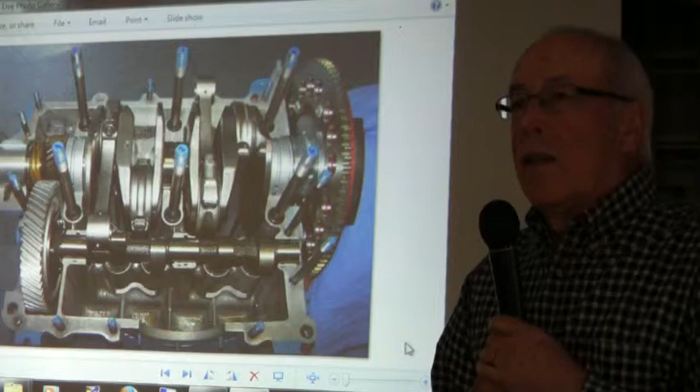At the time I made my decision, I was already taking lessons on the Allegro, which is Rotax-driven. I had a lot of confidence in the engine. When I was hearing the engine in flight, it made me comfortable, it's such a smooth engine, not that noisy. So I thought the Rotax is a solution for me.

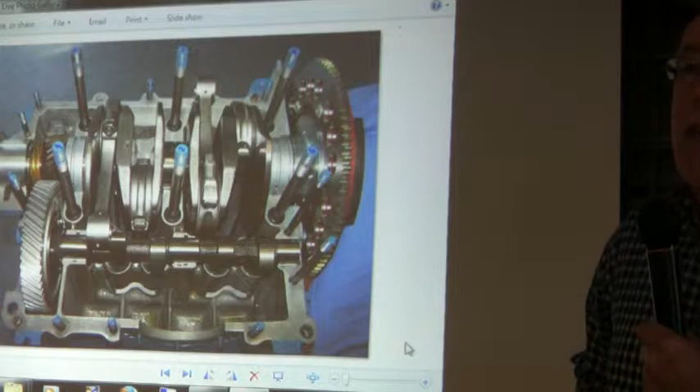Of course, given my age, light sport was a solution too. You never know when you're in your 60s how long you are going to be in good health. Although I had no particular health problems, I thought it's the conservative way to start flying.

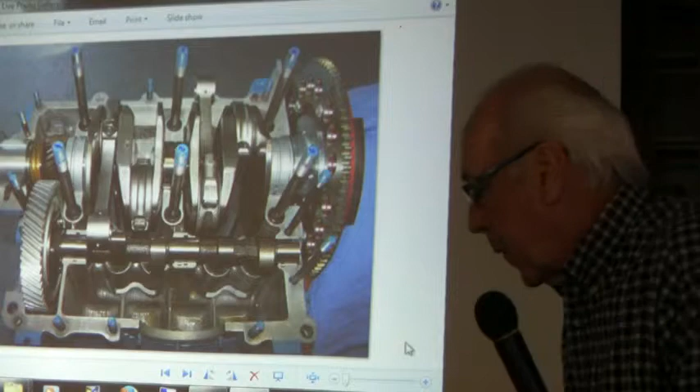So here I am in business in 2010. Well, this is not very good. I'm sorry about that.

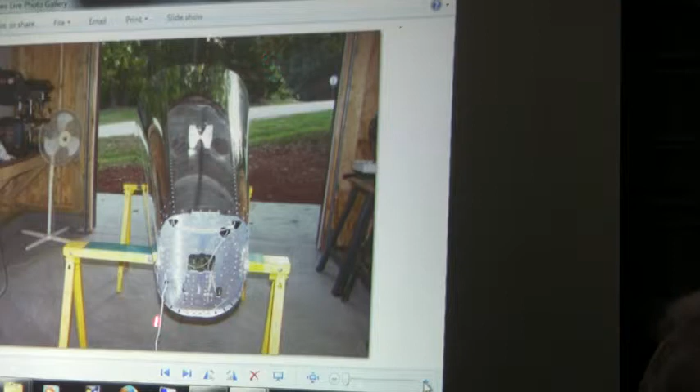This is the tail cone, also part of the biggest part of the first kit, and it's a pretty bulky part. Actually, I had a problem. Well, I had a problem all the time. You know, it's a one-car garage. You see how it's not that wide, and as you build, these things take room.

So, vertical stabilizer, stabilator, and rudder went straight away in the guest bedroom, and they stayed there for a couple of years. My wife was not too happy about that. This was more questionable to bring in the guest bedroom. So what I did, I tucked it under the roof, and it stayed there also for quite a while, of course.

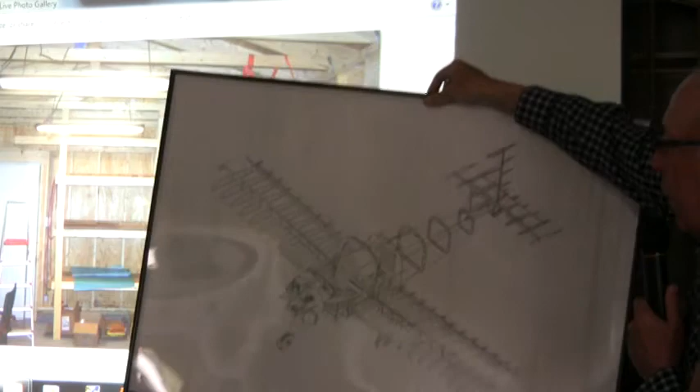Oh, this reminds me that I brought here this drawing you see over there on the wall, which shows in detail all the details of the plane. Unfortunately, we are not in a setup where I can show it to you, but you see much better here what the parts of the first kit are. Basically, from this bulkhead to the end. This is the first kit.

So I start building the wings in the middle of winter, and before closing these wings, I used a nice feature of EAA, which is use of a technical counselor. So I asked for a technical counselor to come for an inspection of what I had done. And a guy, I don't remember his name, came to my place and made a nice inspection, was very encouraging in his report. He's making a report, I still have the report. Actually, he collected all the reports he made.

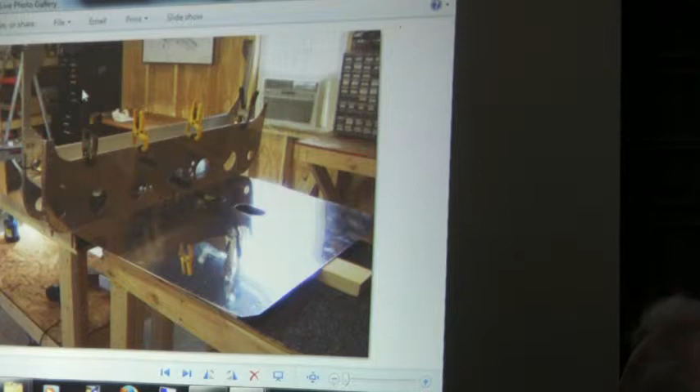So we are sitting in front of it here. And actually the wing spars, the two wing spars, are also coming and sliding in front of it. Yes, for those who don't know the RV-12, it's the only, I think, light sport that has removable wings. A very convenient feature, and you are going soon to see why it's so convenient.

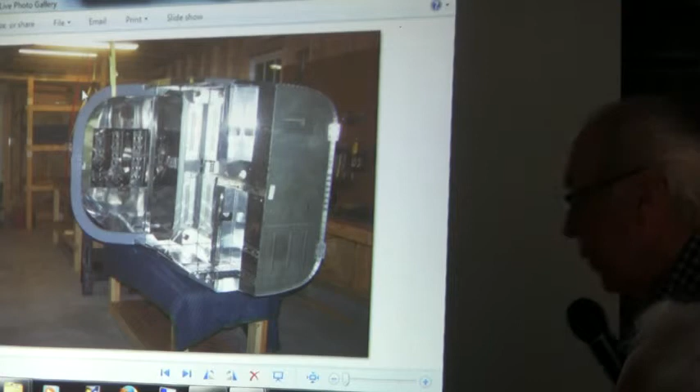When I continued to build, you see that at some point, to have better access inside the cockpit, I built it with the fuselage on the side, so that I could much more easily work inside rather than going into it. So the fact that the wings are removable means that you can, for a long time, work without the obstruction of the wings on the airplane. Actually, still now, when I do my first annual review, I will remove the wings to have better access to everything.

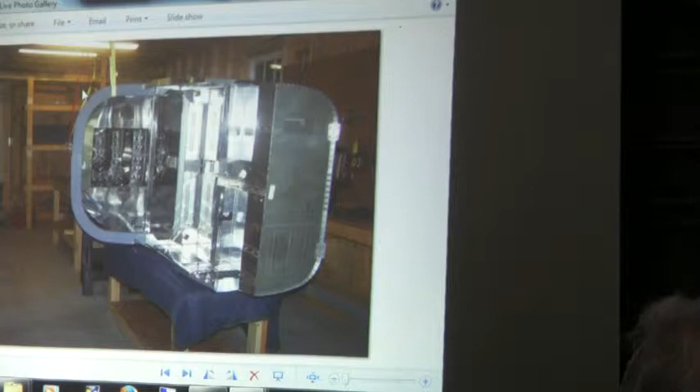So the fuselage is probably one of the biggest works to do. At some point you see I attach the tail cone. The tail cone is no more hanging here, but has been attached. But it's still workable, I still can turn it on its side. My daughter came and we installed the seat, so we could really make real airplane noise, starting from this point. That's it.

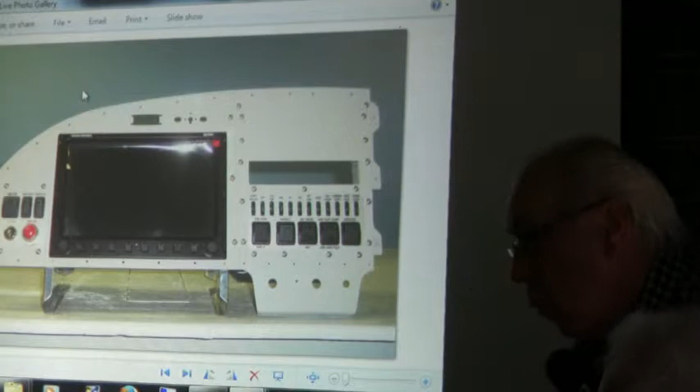Ah, yes, an interesting one here. While I was building the wings, probably in the middle or the end of 2011, Van's announced that they had discontinued their initial avionics. The first avionics was a Dynon D100 with, located here, a Garmin GPS. What happened is that Garmin stopped making this GPS. So Van's was stuck, and rather than taking the new version of the GPS, they knew the SkyView had just come out. So they decided to switch to the SkyView because the SkyView has a GPS integrated.

So they came with this, and this is not mine, it's what they displayed at the time when I was building the wings. The new panel. Of course, my panel was for the old avionics, which means that this part and this part had to be changed because the SkyView screen is larger than the D100. So first big change, and they took this opportunity to also change the position of the buttons and so forth. So it was the first thing that I experienced that would happen again and again.

The RV-12 being a pretty recent design, I think it was complete from the kit standpoint at the end of 2009. But not that many planes had been built at this point. By the way, my kit number is 395, which is pretty respectable for a kit just 2 years old. But at this time there were less than 100 planes flying, I think.

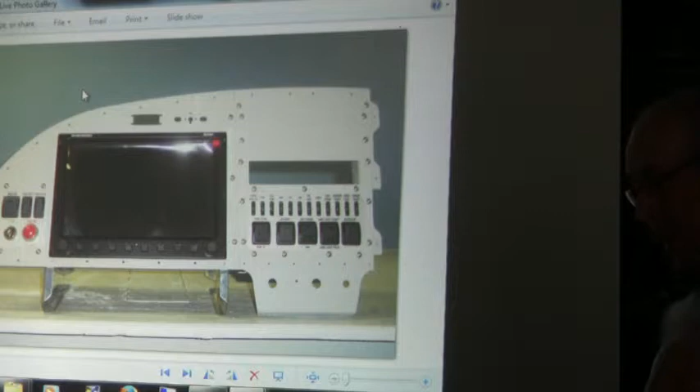Okay, so let's go now. We are in June 2011. The finishing kit is coming. The finishing kit is lots of stuff actually: wiring, gas tank, landing gear, canopy, cowling, autopilot. Lots of little stuff, and the big box is also explained by the fact that inside there is a canopy bubble.

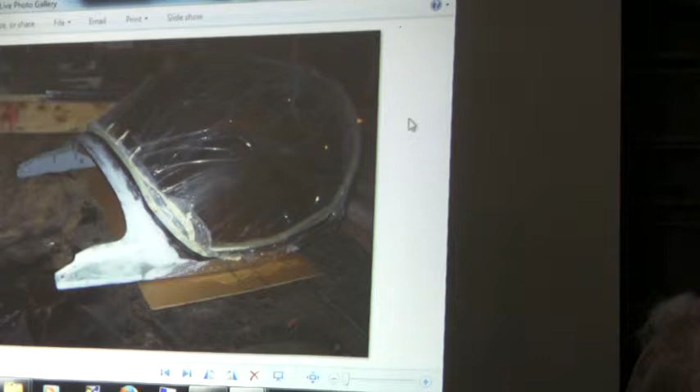The canopy here was a critical part, very difficult, and I didn't want to do it. It's the canopy fairing in fiberglass, and I asked Roger Fowler, who is part of this group too, who is very skilled in fiberglass work, to do it. So he took care of this part. I'm happy that he did it because it's very nice, and it's so visible that if you don't do it well, everybody will see it.

You know, you get very famous when you are building an airplane in your neighborhood. I used to work with my door open, and for a long time this thing looks like a boat. And it took quite a while for neighbors driving by to find out that I was building a plane. And then I became famous, you know. My wife was once at a meeting at the local church, and there was a nice lady beside her, and they found out they were in the same neighborhood. And the lady told her, do you know that there is a man building a plane in our neighborhood?

Well, what did your wife say? Did she deny it? Never heard of it. Never know. Such a crazy guy. Maybe she did. She didn't tell me the end of the story. Who knows?

So now we are in... I received kit number 4, the finishing kit, in July 2011. We are in June 2012, 1 year later, with kit number 5, which is the avionics. Of course, 1 year later, because Van's had lots of problems releasing the new avionics kit with the SkyView. They had lots of problems because they were nice enough, of course, to take into account people like me who had built it before, which means that my wiring in the finishing kit was based on the old avionics.

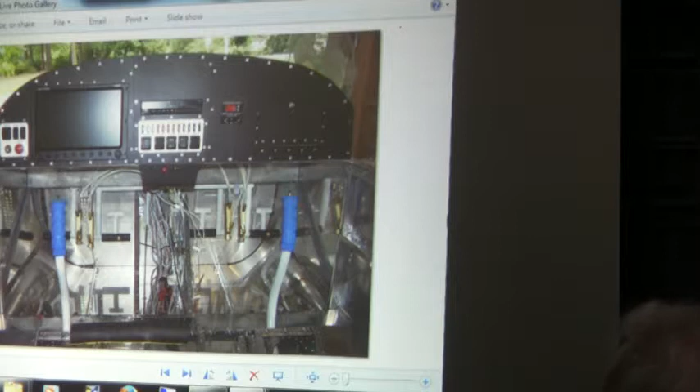And you see here, in a pretty well advanced stage, my avionics panel. All the wiring here is pretty messy because it's not yet tucked in correctly, but it shows you how much work you have to route all these wires along the center channel, some of them to the tail.

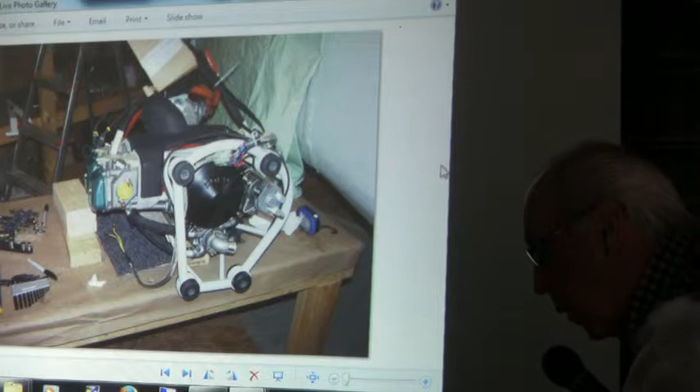So June 2012, avionics. Avionics basically is made of SkyView, Garmin radio, intercom, transponder, ELT. So pretty well equipped actually for light sport. Then December... no, we have to go to the painting first. Yeah, from December to February 2013, I went into painting.

So this is my painter, who was nice enough to come and pick up my plane. You know who this guy is? Where are you? Okay. He didn't want to hear it actually. He escaped. Terry Gardner, my technical advisor, was also my painter. He called himself Monet. Claude Monet. I didn't invent it, he said it himself. So Terry came and picked up my plane,

You can use it as a simulator too. Right, good idea. Yeah, I could have tested my horizon with this situation.

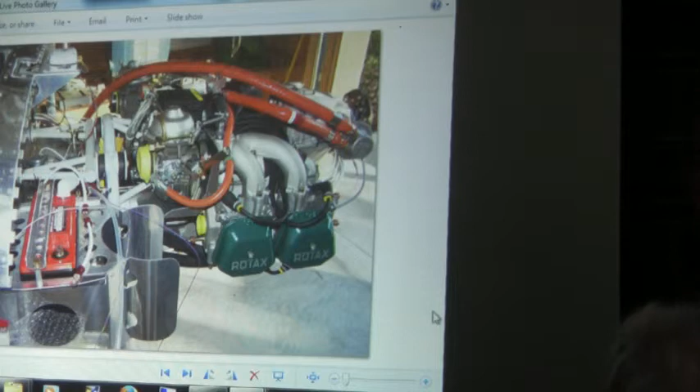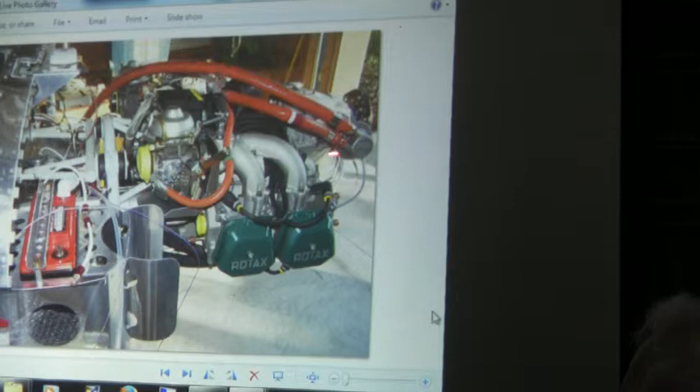To do that, you have to remove all that on top. So that was quite a lot of tedious work. And here you see it's hung, and you see how much stuff I had removed - that's all what's on the top here. It's hung on the firewall now, and you see how short the firewall is to the tip.

The reason is that the RV-12 has a particularity as a plane. I told you it has removable wings, and we are sitting basically at the front of the wing, in front of the wing spar, which means the center of gravity tends to be more forward than other airplanes. So they have to compensate by making a very short firewall forward, which means you have a very short hood in front of you while sitting in the plane. It's very particular to the RV-12, I think.

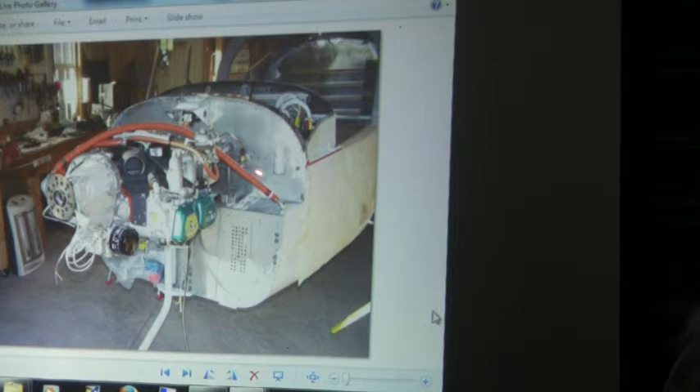So this is the front view. I see there are still things that are not hooked up.

I'm going to start working on the spinner, but I think I'm turning crazy. This is a very dangerous piece of hardware here - I still have the mark of it. It's a pitot tube. Because we have removable wings, the pitot is actually in the spinner, and it goes through once you put the spinner on the propeller. But for a while this thing is protruding, and of course, before I put this warning here, I hit it and got a big scar on my side.

So this is close to the end here. We are in June of 2013, taking the airplane to the airport finally, with the engine and propeller installed. This is Dan Kangas, a fellow RV-12 builder from this group, who helped me with the work.

And the plane is ready here to go, and that's it for the firewall forward work at the airport.

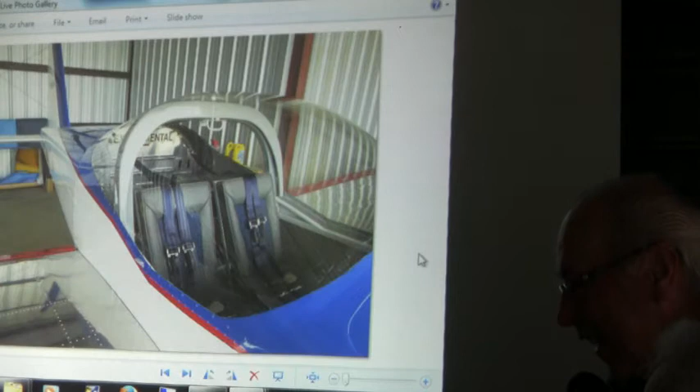Okay, and finally I worked on the inside, also installed all the cushions, and it looks more and more like a certified plane, except that we have this big 'Experimental' label in the back.

So that's it. Do you have something else here? Ah yeah, so finally I go through the...

Finally, I went to the certification. It went very well, and then the first flight.

Test pilot Steve Merritt, one member of our group, is the manager of the airport. I hired him to do my test flight and also my transition training. He's a CFI, so that was very convenient for me.

I had the option. Most RV-12 builders had a problem at the time with transition training, because there was only one place providing commercial transition training. It was the only place with a certified RV-12, built by Vans to make the certification of the RV-12 as an ELSA. So it was the only airplane on which you could pay somebody to train you.